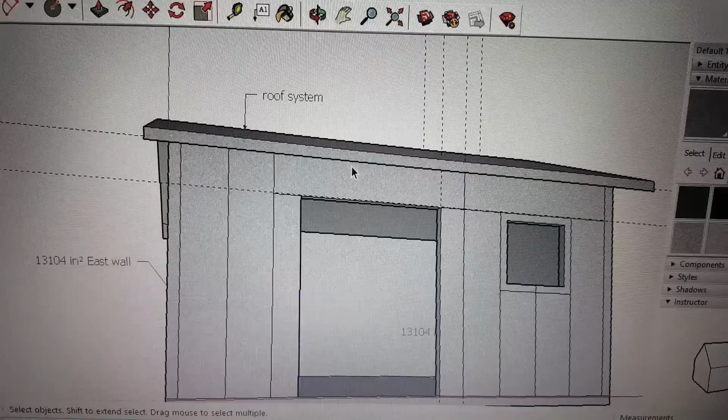It's the Do Carpenter. I wanted to talk to you a little bit about some ideas that I've been having as I've been working through this project of building this aircrete shed. Most of you have been following along, but if you haven't, each one of these panels represents an aircrete panel that will be sewn together at a later date.

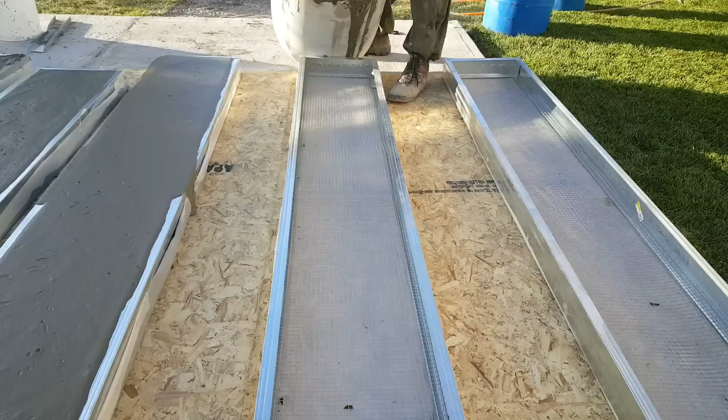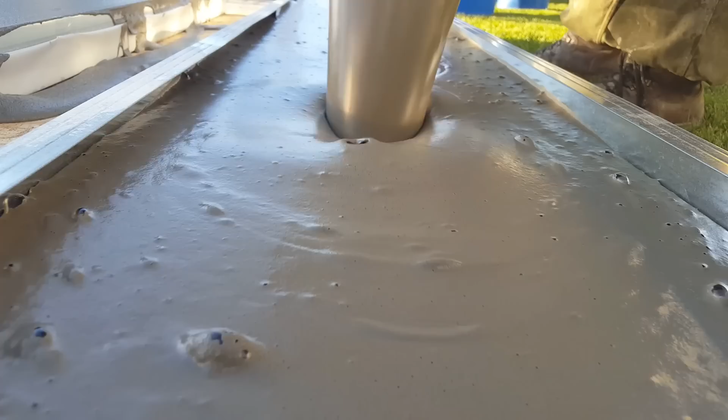They are all encased in a form. I was using sheet metal studs as a form to make these panels and to pour it into. Here's the basic building and the basic layout of the panels. Now, that being said, let me go into another screen here, and I want to talk to you a little bit about some ideas for some alternate forms for those panels that I've been thinking about.

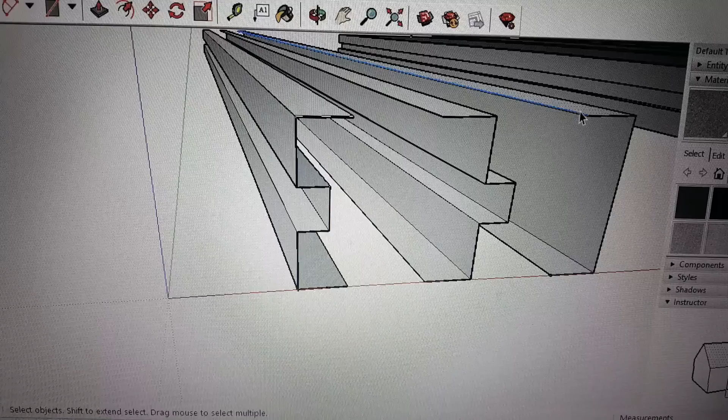Now, this panel right here, I'll highlight it in blue. Well, I think I will. There we go. It is one that we have been using. Essentially, the sheet metal studs that we are using look just like that.

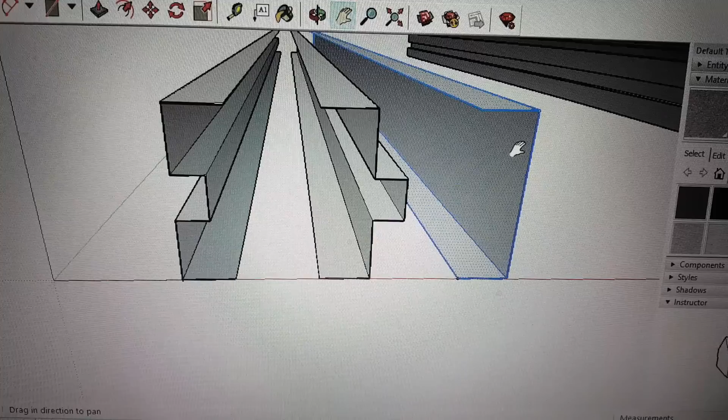And you guys, in a prior life, I used to work for an architectural sheet metal company, and we had all sorts of roll forming machines. We would manufacture anything from gutter systems for homes to different styles of roofing panels and wall panels on these roll formers, and every roll former was unique. So just know that when you go and buy these sheet metal studs from Lowe's or wherever you get them from, they are made on a roll former, and I'll show you a little bit about that as well.

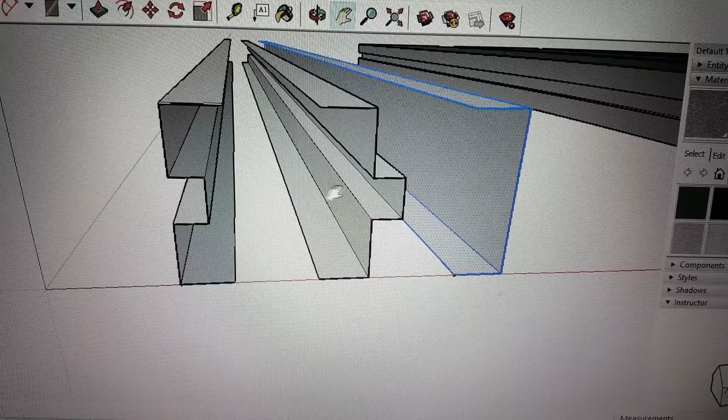Now, I was thinking about doing some tongue and groove type panels, so when you put them together, they would just kind of go together like a Lincoln Log set, and they would look a lot like these ones right here. So I just highlighted that one. This is a female panel, and this is a male for the tongue and groove system.

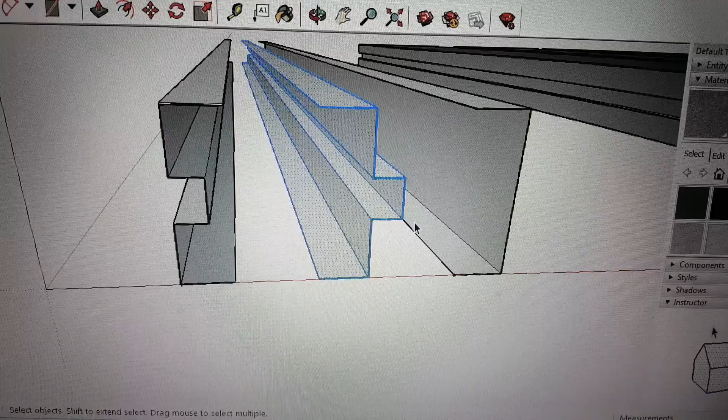So essentially, I have some examples right here, if I back it up a little and move them over, of ones I've drawn up, and I've just kind of virtually poured the aircrete into them. So these have the forms on each side, and there's no form on the bottom, because you would just cover that with a C-channel on the bottom and on the top, and that's what would kind of sew them together.

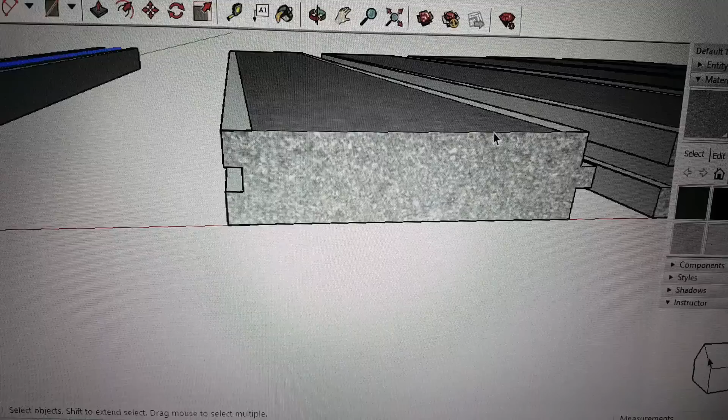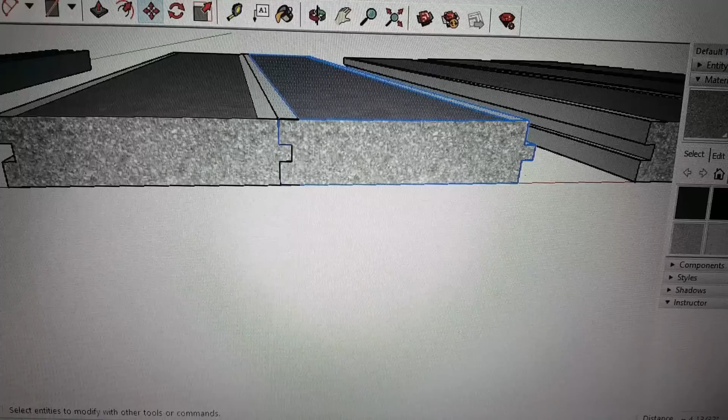Now, that being said, hold on, let me see. We could just bring these together, and I'll just show you what they look like when they're kind of pulled together a little bit. Okay. So they would just fit together just like that. And let me pull another one over. I don't know how many I drew on there. Oh yeah, there we go. I'll just pull those all together real quick.

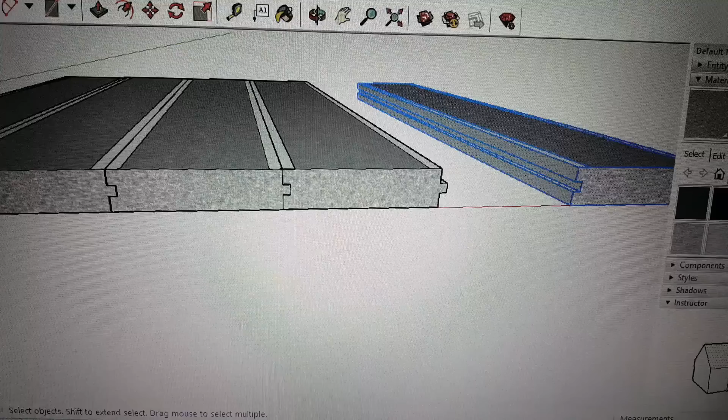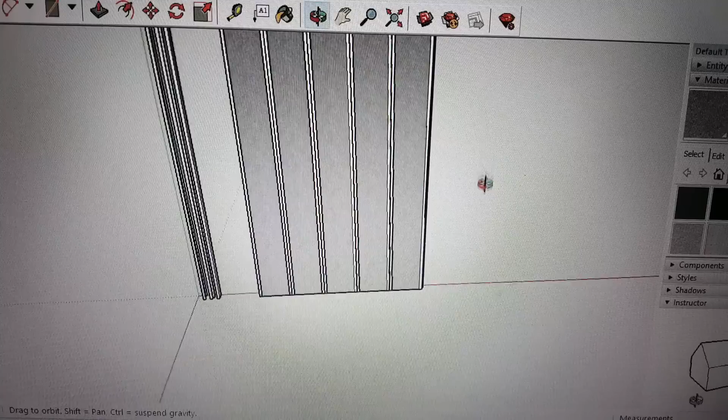This is something I've been thinking about as an alternative way to build these sheds. The reason I've been thinking about it is I just want a way that's kind of quick and easy for people to do it. So essentially what you'd end up with is a wall that looks like that. Now, if I tip that wall up, essentially it would look like that. And then on the top side, of course, it would look pretty much the exact same as the bottom side.

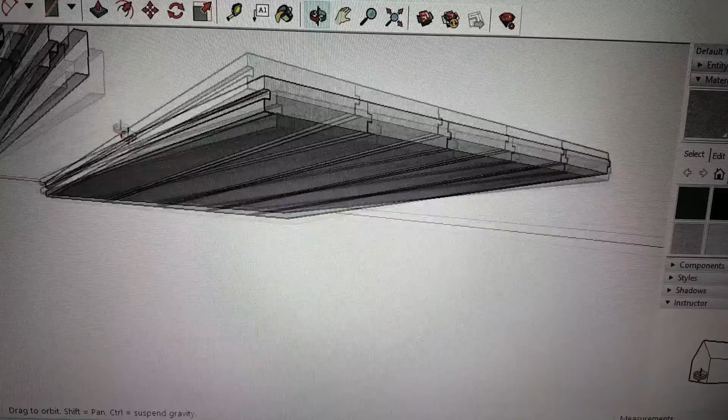Now, once you got the first panel up and just put kind of an angle brace down to your slab, you could just stick the other ones right on it. And of course, let me get that turned around. There we go. On the bottom of it, you would have a C-channel. Instead of the way I was thinking before, you would just take some Rawlplugs or some expansion anchors and anchor a C-channel along your slab and just lay these in it and then slide them together.

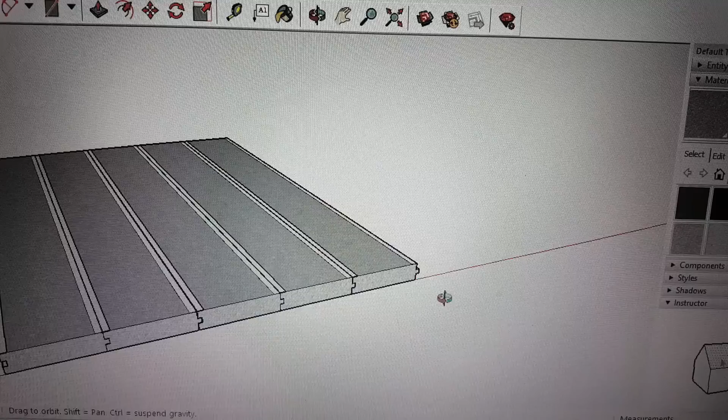I was also thinking about possibly putting some holes in the forms while you're pouring them, similar to this right here, like putting a hole right there that went all the way through. Let me push that in. What that would accomplish is you could take some 3/4 inch or 1 inch PVC and stick it all the way through your wall system before you poured it. You could put a release agent on it that kept a nice little film between the aircrete and whatnot. Then after it had set up, you could just pull that out.

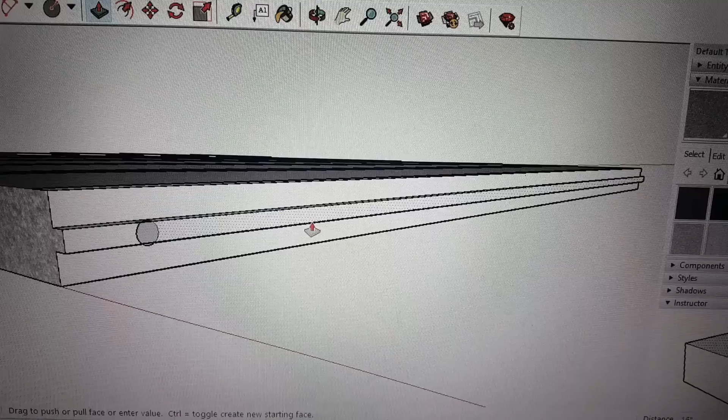And when you went to put these panels together, you could either put some tensioning cables through there and tension them together, or if you put some more holes in the center, spaced evenly up through here, you could run conduit and wire for services. And because it's aircrete, you can just drill right into where the holes are, and you could put all types of things in there that way. So that was just an idea. Let me see. Undo. I want to undo that hole.

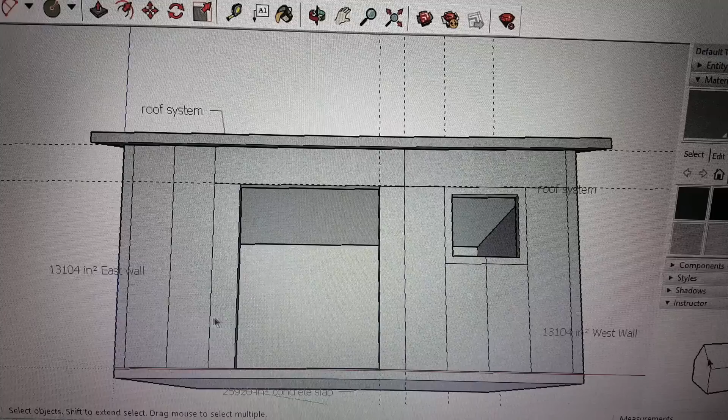So that's something that I was thinking about. Now that being said, let me pull the shed back up. If these were tongue and groove panels, it would be really easy. Like on these headers, on these panels that line a window or something, you could put a male form on the top of this panel, and then put the female side down on this header panel, and it would just lock right in over top the window or over top the door, and it would make those details go together like a Lincoln Log, really easy as well.

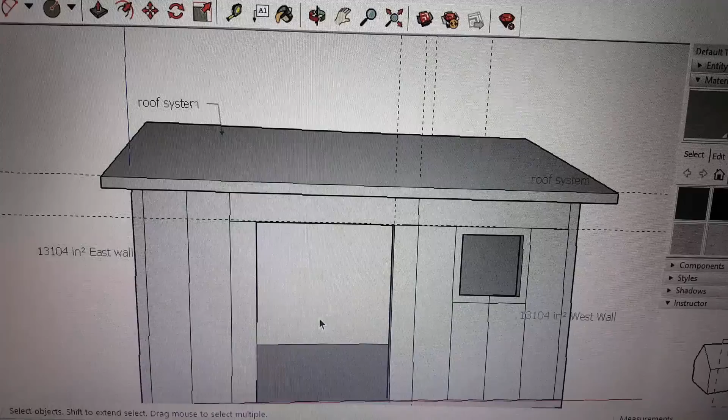And so it's just something that I was thinking about. Actually, I had been thinking about it for quite a while, and I was at Harbor Freight the other day returning an auger head, and one of my viewers was in there. Actually, about 6 or 7 were in there. It was weird. But we got talking about this, and he asked me if there's any way I could do a tongue and groove, and I said, actually, I've been thinking a great deal about that.

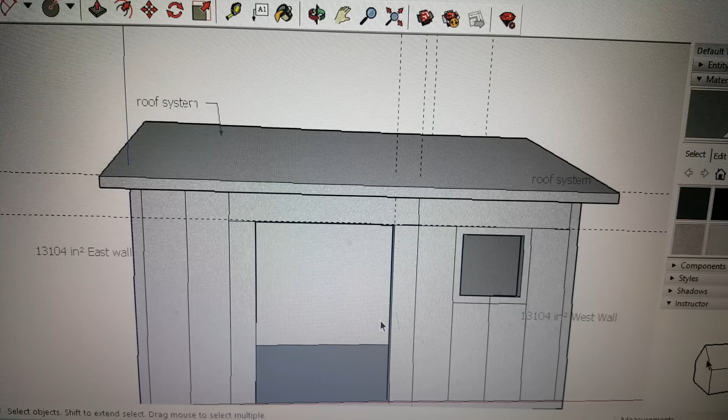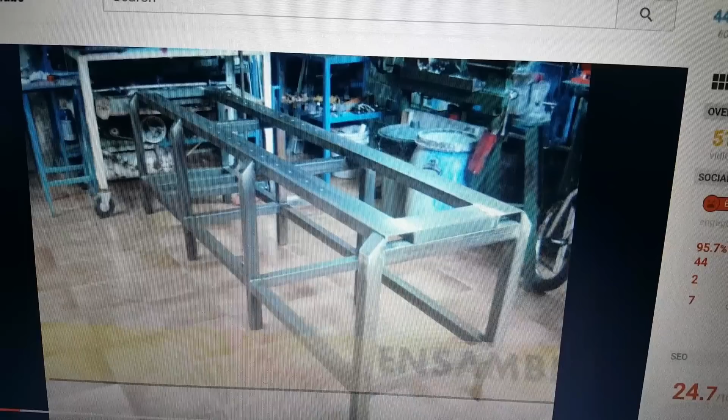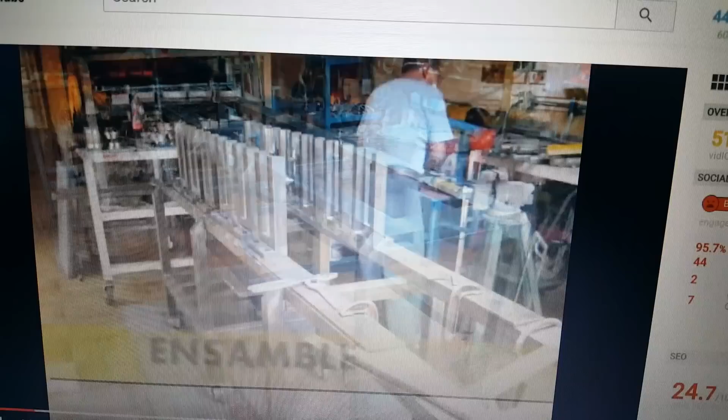Now, I talked a little bit just a minute ago about roll formers, and I want to show you some examples of that. The particular one that I've chosen, I chose it for a reason, because this is one that was fabricated in a shop, and I used to work for a fabrication shop. This is definitely something that isn't outside the scope of my talents, I'll tell you that much. But this is them going through the system of building a roll former.

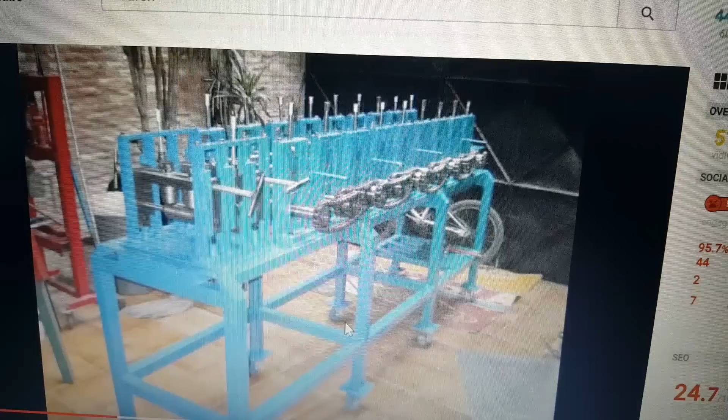Now the stands up here on the side are just all the braces for the fulcrum points of all the axles that would go through and would hold the actual machined formers. That would be these rollers in there. You see they've got the chains that go from axle to axle, so they all turn at the same rate. And there's a better view of it right there. But the reason I'm showing you this one is they built it in a shop to make specifically studs. Now here they put the guard on it and they've got the drive motor down there.

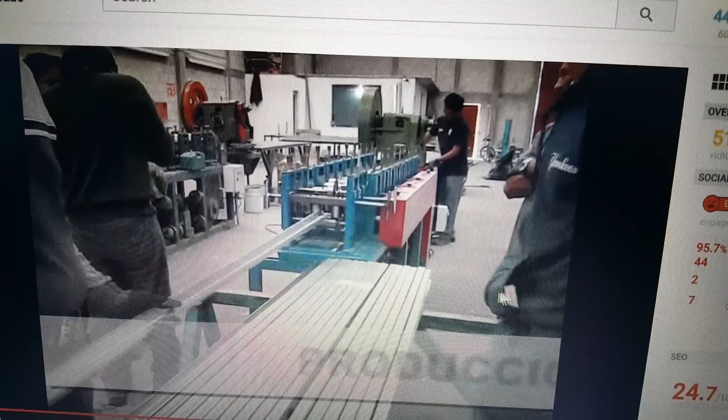But as you watch these studs being made, they start out as just a flat piece of sheet metal. And I'm going through this in quite detail in case someone's never been around this type of machinery. I have operated it for years and years, so it's not that big of a deal to me. But you take that flat piece of sheet metal and it comes out the other end a sheet metal stud, almost identical to the ones that I am using right now to form up the wall panels, with the flat sides. That being said, it would be real easy to build a machine like this and just augment the rollers so that it formed them in the shape that I was just showing you on the previous clip.

Now, this one particular machine doesn't have a full coil on it to just run continuous, and then have a break at the end where it can just cut things to specific lengths. So I'm going to stop this, and I'm going to show you one that is really similar to one I used to operate, that we built gutters out of.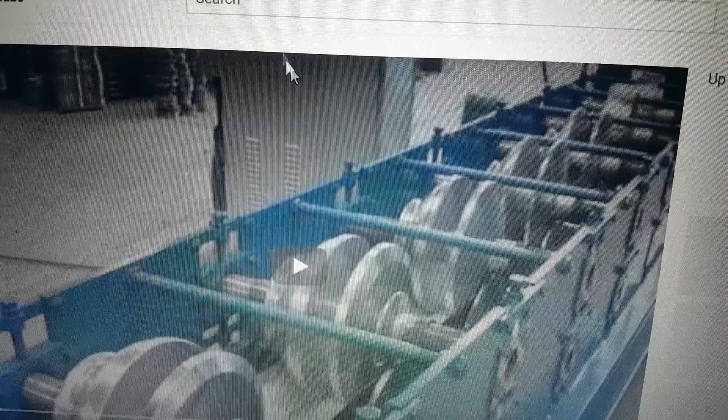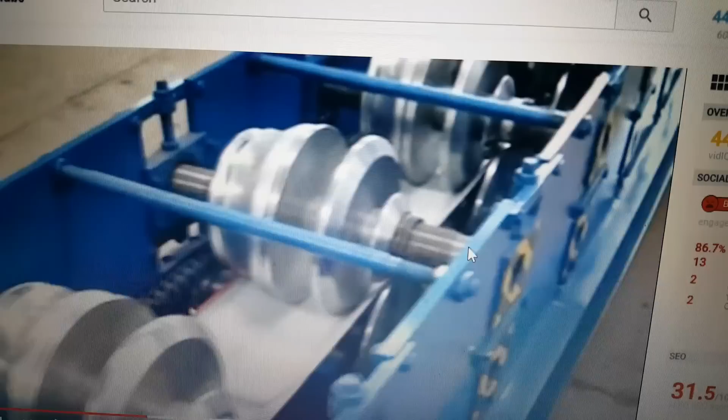And here this one is, it's running off of a coil, meaning there's a big roll of sheet metal. It could make a 1,000-foot long continuous piece of this. So as it goes through the different rollers, each one just folds it a little bit further and a little bit further, and then when it comes out the other end, it's the exact perfect shape of a gutter. They have little machines like this that you can put in a trailer, and guttermen use them all the time.

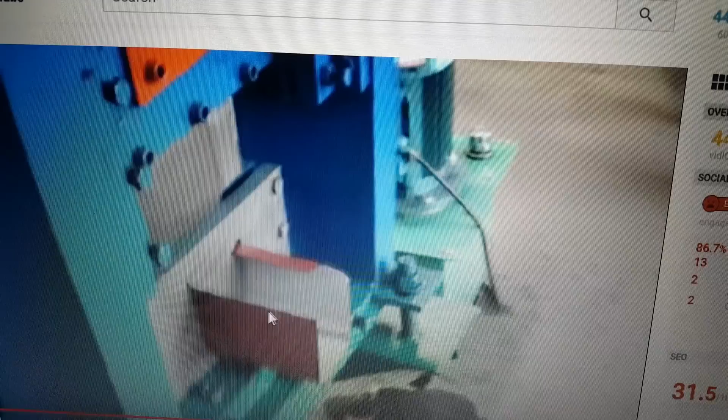But the only reason I'm showing you this one is because I want you to see at the end they have a hydraulic shear on it, and they can shear these sections of gutter to the exact length that they need them. As it comes out the other end, it comes out the perfect shape of a gutter, and then it has a hydraulic shear, so you can shear these things to the exact length that you need them. And here's another good example.

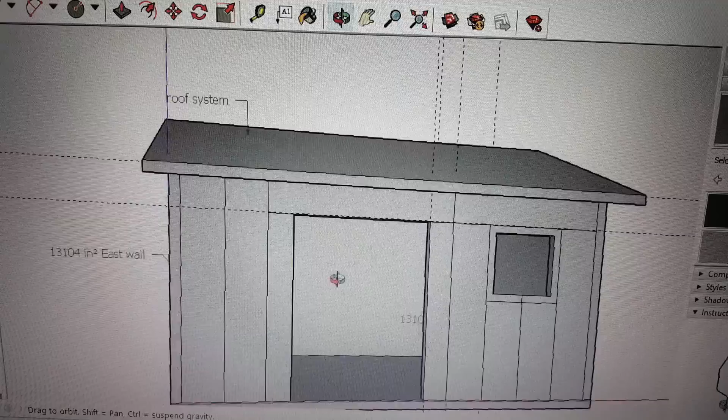The thing about it is what I would like to be able to do, and I've actually invented an aircrete machine that has a conveyor belt that runs Portland cement out of a big hopper, and all the dry ingredients as well, and homogeneously mixes them, and then takes them on a conveyor up into a mixing solution with water and paddles and mixes it.

And then once the slurry is mixed, it's immediately sucked into another barrel where the foam is folded into it, and then a positive pressure at the bottom of that barrel sucks the completed foam out. And these are pretty large barrels, so they'd be about 80 gallons at a time.

And the way it would work is while the positive pressure was pushing the aircrete out to pour all these panels, you would be mixing a whole other batch behind it, so it could continuously make about 20, 30, 40 gallons every 10 minutes. I mean, it would just be a continual flow of aircrete.

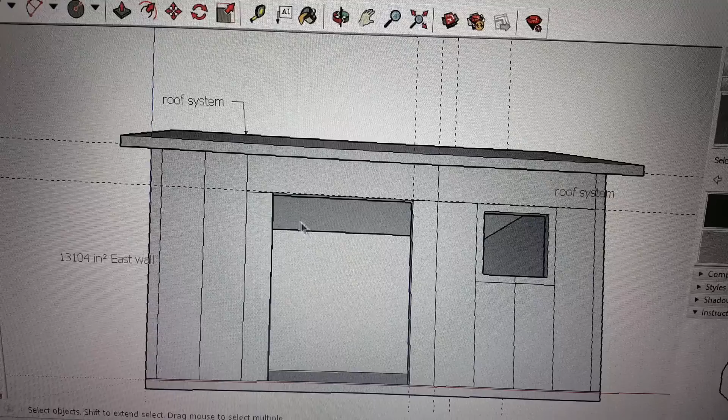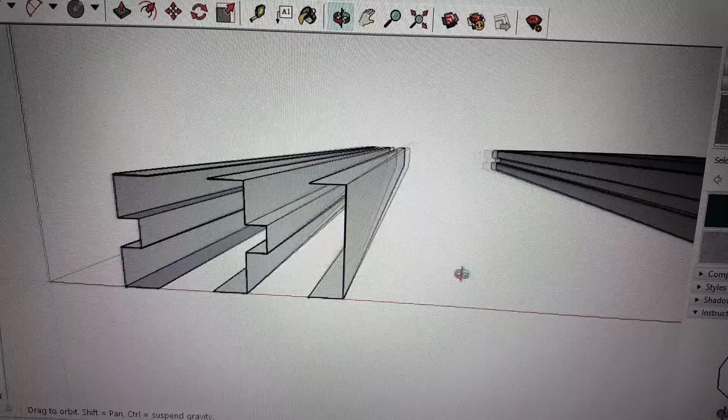So essentially you could take all these panels and just lay them out. Here, let me pull up these. You could lay out all of your forms the right width apart. The ones that were male and female would be married together in the middle, and you could just sandwich them between a form piece with some form release on them, basically in the exact shape like these are now. Let me give you a better look at that. And you could lay this wall out, and you could pour that in a matter of minutes.

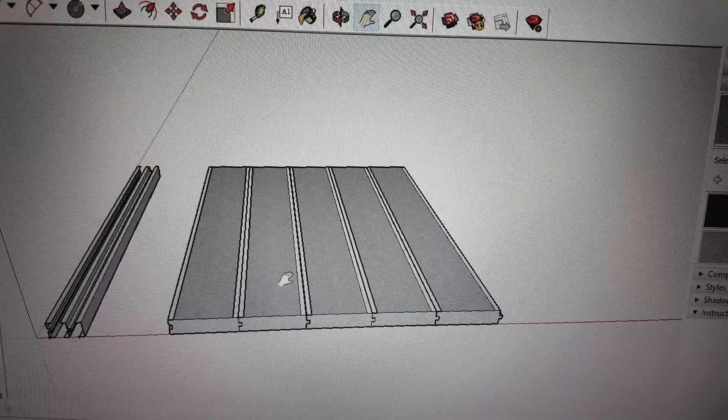And so my whole idea, and this is one of the big reasons I really want to do the Kickstarter and get an aircrete laboratory and a shop up, is so that I can experiment and build these form machines that would make these types of forms, and then I could draw up and put together different kits for different sizes of sheds, and it would all be computerized, really. This kit needs so many studs this length and so many studs this length and so many headers, and it would just pump them out.

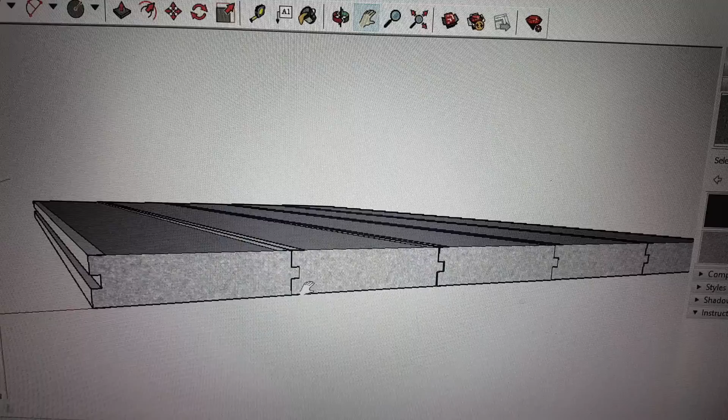You could just bundle them up and ship them off, and it would be kind of fun to eventually, after this catches traction, have strategically placed locations, and franchise this out and give other people that are interested in having a business of their own an opportunity to, when an order comes in within their region, ship it out from there, and it would save people tons of money in shipping. We could just ship these kits out for different styles of buildings, and they could just go to a website and choose the building that they want.

And if they wanted to, they could just rent the aircrete machine that created a continuous flow of aircrete, and they could really DIY put up these buildings for themselves, or they could hire a contractor to do it. It would all be drawn out and engineered, and once they got them all poured, it would just go together as an erector set. So that's just some things that I've been thinking about.

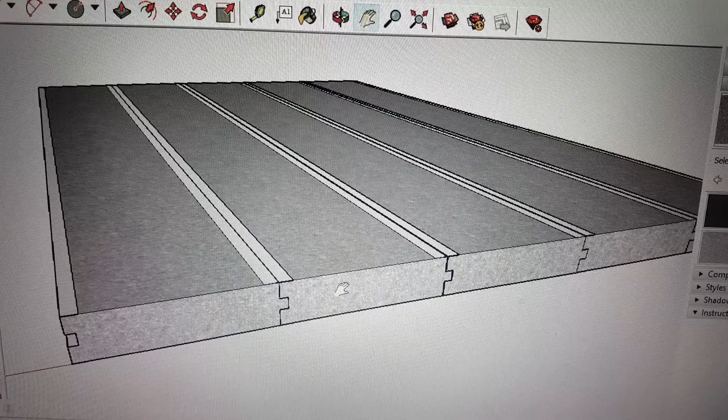We are going to go ahead and finish this project. We should be releasing the video tomorrow, putting this together. And the reason I mention that is because when we sew these panels together, I'm going to use two different types and ways of sewing them together, and just kind of get my viewers' input on what they think is best, so when I go to sew all the panels together on the shed, we do it the best way possible. But I just wanted to let you guys know what I was thinking and what I was doing.

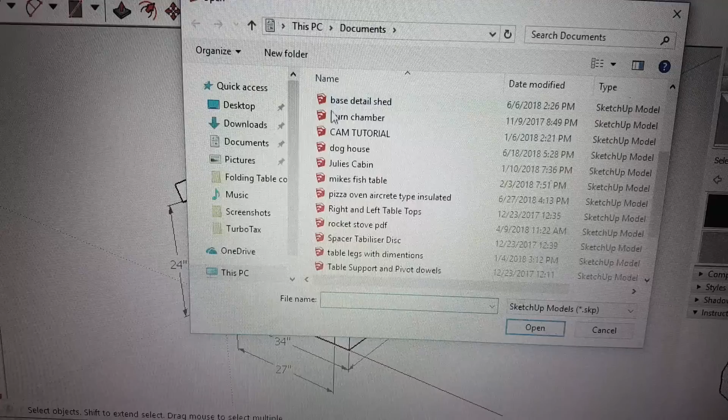Let me go to another one. I want to open up another file, the base detail, just so that I can explain what I was talking about earlier on how the base detail would work on this other system. So instead of using that piece of angle iron and anchoring it in, I had a viewer tell me, why don't you just use expansion anchors every so often, and just put a piece of C-channel down. And actually, I think that's what I'm going to do. And then I'll run a piece of C-channel along the top as well and sew them together. And I will have to do something, because these are not tongue and groove panels.

The reason I did it this way, guys, is I just wanted to do a project with aircrete, and I wanted it to be DIY, and I wanted to do it out of stuff that was available to me. And the stuff that's available to me on the market are those roll-formed sheet metal studs, so that's why I used them. Obviously, they don't have the tongue and groove ones readily available. This is not something people can just go get.

And it would be kind of fun to come up with a system like that, where you could pump out a whole shed's worth of forms, all the right lengths and everything, and offer them to people. We're talking maybe years down the road, but it'd be fun to put up different locations throughout the United States where people were able to have one of those machines. And I want to build those machines. I want to experiment with it. It's not something that's outside the scope of my talent.